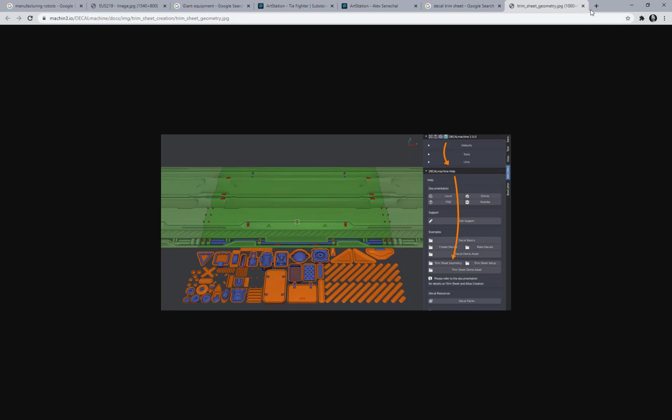This is one that I thought was pretty cool - I'll zoom in on it. He broke it out, or she broke it out, into separate pieces like this. And this isn't the one I thought of - hold on, let me grab this one. I liked this one because each of... I don't like the animation of it though.

I like that one because Decal Machine's talking about Blender, but I don't really mind if you do it in whatever - the thing to me is that the decals are floating. And the big thing we're going to focus on after the initial stuff is making sure they fit into a quad, basically, in most cases.

Okay, so let's get straight into it. Let's talk about what we need for reference, or what we're thinking about with reference. I've done a few of these, so I just do it blindly. But if you want an idea of where the reference would come from, it's this kind of stuff.

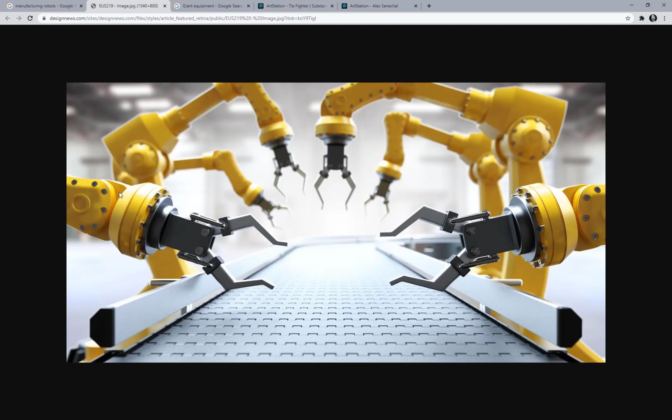These little detail things that we want to try and do - these little arm things, these free-floating things are different, but the ones that are stuck on the surface, that's the kind of stuff we want.

So all of these little hiccups and bumps and stuff, we can build and get something close to, and have fun doing it, and then use it on any model we want.

So let's talk about what we're going to do this time first. First off, we're going to do it really simply, inside of Max, of course, because that's what we work on in this class. We're just going to start with the simple forms, and it'll make sense as we go further and further.

First, we're going to try and do some insets. So insets are - let me see if I can find one of those references from the trim sheets. Oh, of course I closed that one. That was silly. There, decal trim sheet.

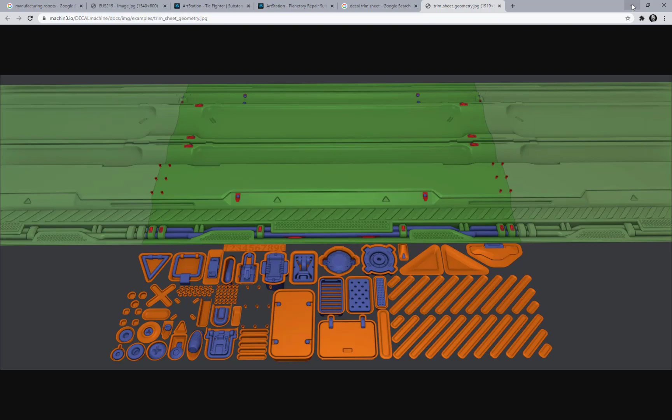We'll be able to build on those for multiple pieces. To start with, the first thing we're going to do is make a plane in the background here, from the top viewport. We're just going to drag it out. I'm going to make it 1,000 by 1,000 centimeters for now, since I don't know how big this thing's going to be.

It's not a big problem at this point. We're going to change this to a gray, like this. Then I'm going to right click on it, say Object Properties, and turn off Show Frozen in Gray, and freeze it. I could right click and freeze it, but then it makes the gray different, so I want to keep the color the same. Okay, so we have our plane.

Now let me show you what we're trying to do so you can understand the process here. If I unhide this, looking like it's being cut into the ground is what we're trying to achieve. Remember, all we're looking for is maps at this point, and those maps are going to go onto other objects to resemble detail that we don't have to actually pay for in geometry. So this is what we're looking for.

If you look at this, it's a rectangle, and I've put an edit poly on top of it. That's a little weird for me because I don't like using stack as much - I've told you before that's because stacks used to crash all the time, and I know there's a lot of people who use stacks. Okay, so let's just do one from scratch here, and I'll show you.

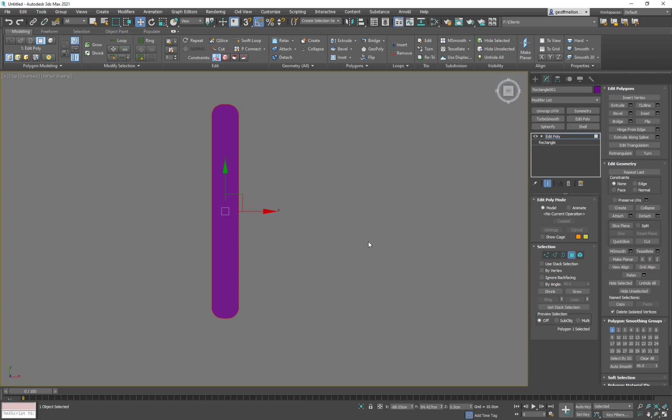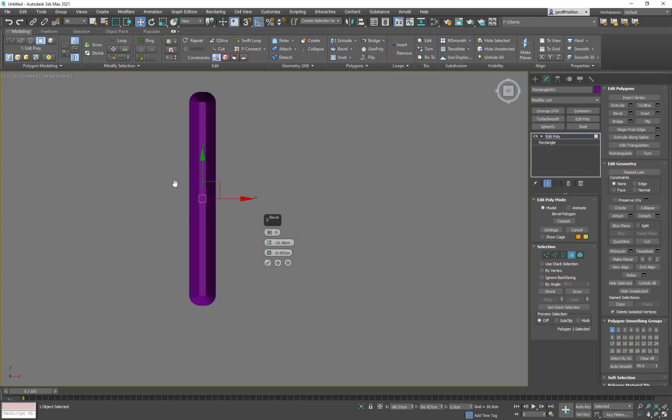I'm going to start to lose the original edge. So what I need to do is be able to figure that out dynamically - that's where it comes into play. You say, let's do like -10. I like to keep them even, and then I'll work with the actual shape prior to this to get the information I want so it feels better.

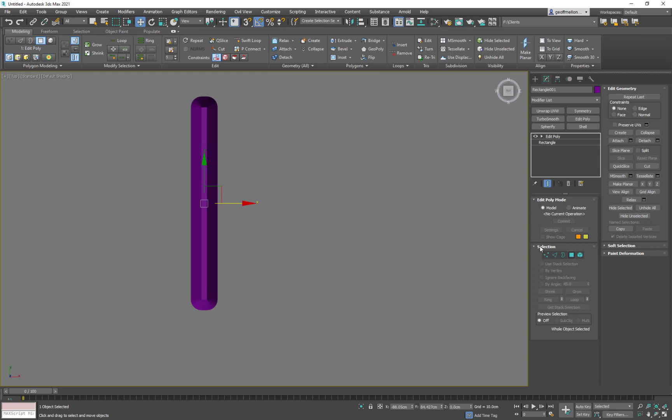Okay, all right, and then I'll come back to, remember this was the original form here, so I'll drop back down. If you want, you can get out of edit mode and copy it so you can see your edits compared to the original. You can even just delete it if you want. So there's the original. What I'm going to do is go back down in the stack, and then I'm going to play with this.

The numbers I came up with don't mean it has to be perfect, these are just for your own feeling. So I came up with 300, so it's a little bit longer like that. That's fine. And then you see there's these weird stretching things inside of here.

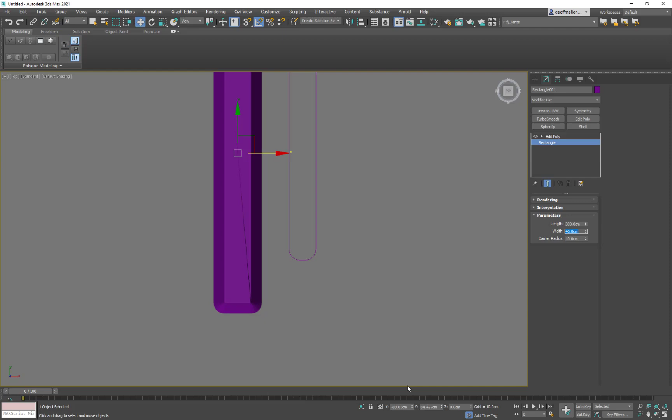So I changed this to 45, and then these are almost corners. What's going on here is they're overlapping - if I look, they're actually clipping each other. That's why we're seeing it that way. So I'm going to change this by scrolling up and down to get what I like.

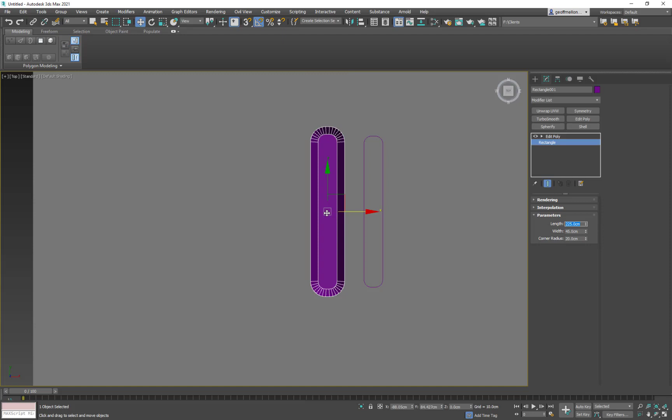And I'll get something like, I think I did 20. Yeah, so it's the same form. And if I want, I could pull this back to 250 or something, or even 225 - now that's the wrong number. There we go, and it's much closer to the original form I was thinking of.

Now if I take this off, you can see that bevel going in. We could also come back up here and tweak some stuff - say I want this a little bit deeper, though it doesn't really matter. Really all we need is the slant between the top and the bottom.

So we'll come here. The other thing I want to do is, if I look at this, when I've been changing it, it's changed my smoothing groups. I want this to be one smoothing group. So I hold Control and double click, and I just need to change it to smoothing group 2 and make sure this is smoothing group 1. And yes, there's n-gons - I know, it's crazy, right?

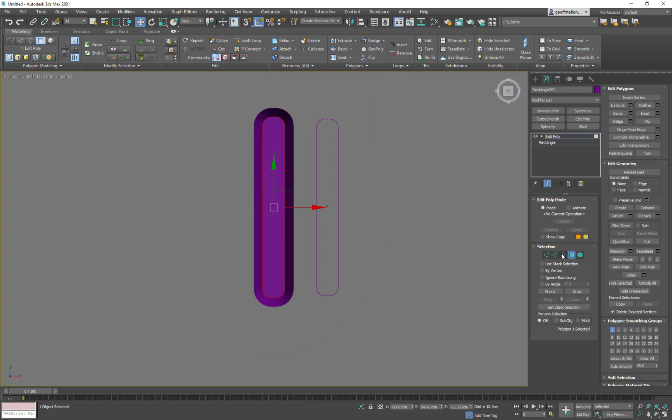But if I change this to the standard color, you'll see now I can delete this one. Got that. So that's what you should do - you should do it as a stack object, and you can collapse it after you're done with it.

So I'm going to do some of the basic shapes, and then I'll come back and show you some more complex shapes that we're going to start with. These are just the caps - the tops of screws. These are the hexagon pieces that go into making things look like they have a hex wrench on it or something, all those little details we were talking about. So let me go through this - I'll do it fast, and then I'll slow down when we start doing more complex objects.

So I'll do this one - I'll do a circle, and then I'll do a hexagon, and I guess that's probably it. Then I'll come back and show you how to do some more complex shapes like an X, okay, or a plus. So here we go.

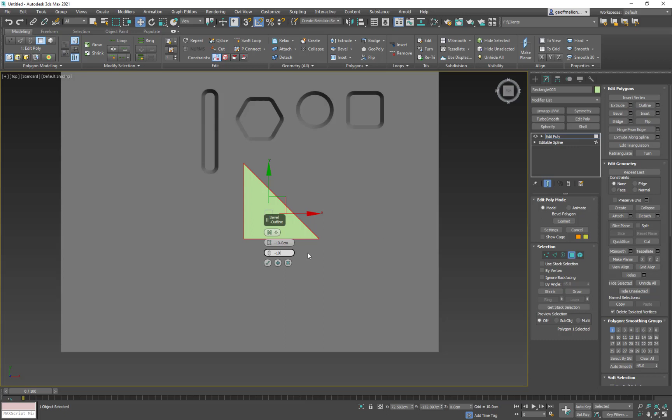fillet. Now this is the dance that we're going to have, so we may want to wait to do this part until after we do the next part, which is going to be exactly the same as we did a second ago. So I'm going to come in here, push X, say edit, go down to polygon, and then do my bevel, grab my face and say extrude or bevel, and do -10 by -10, and of course tab doesn't work, -10, and say okay. And now I've got my bevel in.

Now I'll go back down to my stack, make sure I turn this on for the final, and I will grab that fillet with all those verts selected, and I'll turn it up and see if I can get something that works pretty good. And there we go. We can kind of get the same feel for that. That's working pretty good. And people are like, why would you want a triangle, for example? Well, let me show you what you can use a triangle for real quick.

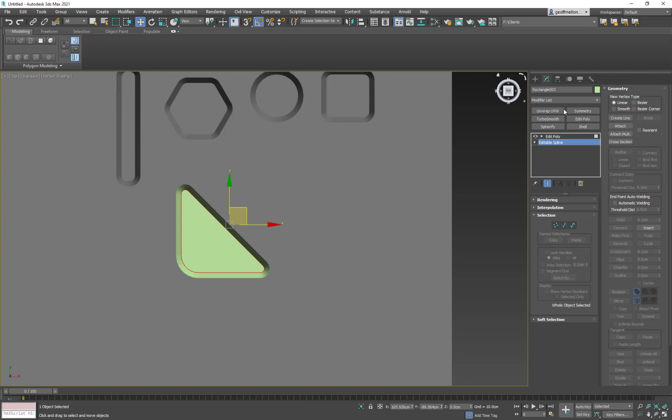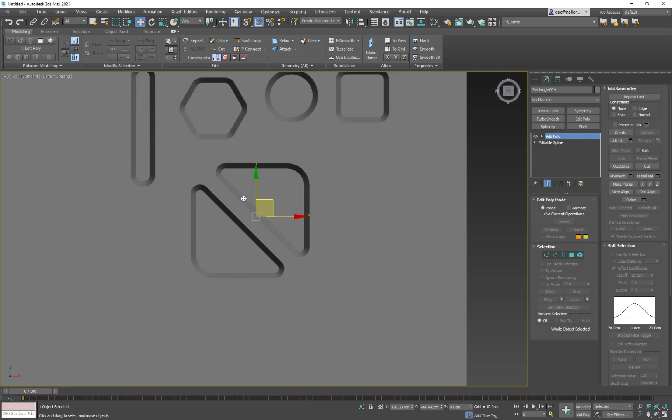Take this, we'll get out of Edit Spline, get out of Edit Poly, and we probably want to do that smoothing thing too, but come here and rotate it like this, 90 degrees, so you have a duplicate, and now you've got one of those boxes with the beams that go right through the middle of it. So things like that. There's other things to use it for too, and you could do a regular triangle this way too. So the last thing I'm going to show you is how to make a cross or a plus or an X if you want.

So I'm going to copy this one, and since I already have the rectangle done, all I have to do is this. I'm going to E and rotate it 90 degrees, so I got two of them, and then I'm going to delete the edit poly off this one here. Go to the original one. Let's see if I grabbed it. Yeah, go to the original one. It's a little bit hard because they're gray. Let me grab this one again and make it a different color just for now. We'll make it purple like that.

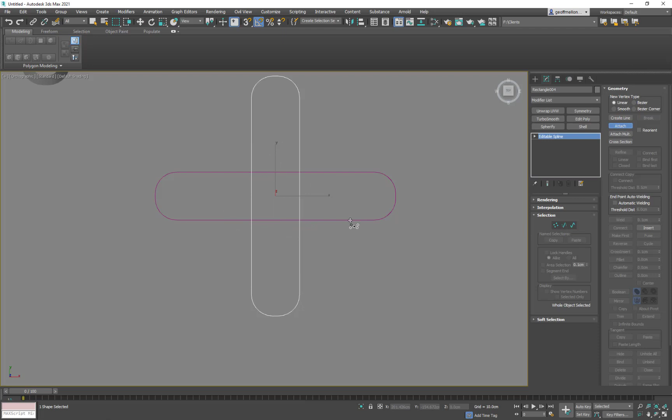Okay, and we'll come to here, and then you should see that they are kind of on the same plane, especially when I go to edit rectangle and don't show the final. So they're on the same plane. So I'm going to actually get rid of this edit poly, and then I'm just going to say convert to editable spline for this one, and then I'm going to attach these two pieces together. And this is where it's going to get weird. We have some dancing we'll have to do, but that's why we do it above. But first, we need to make these all one object and do that cross that we want.

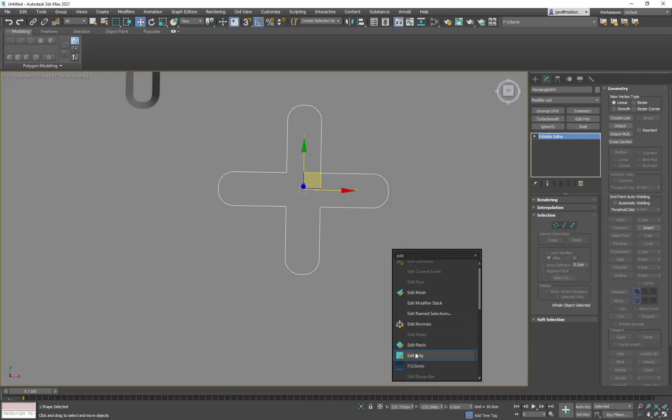So we're going to grab this edge, and we're going to come over to Boolean, and then with that on, we're going to grab this edge, and we're going to get this complex shape. Now, I'm not going to do any more of that until we put the edit poly on. I can round these. We'll see if we want to, but I can go X again and say edit, and then go down to poly, and then go to plane, grab everything, and we're going to get some weird stuff on this one, but it may not be weird until we start beveling those inside edges.

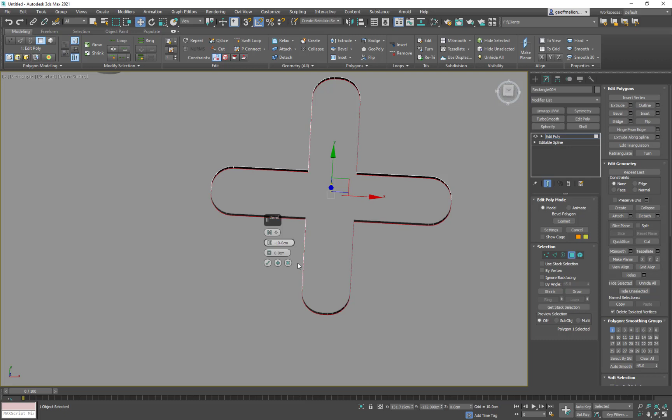I'm not going to bevel them on this one, but you'll see what's going to happen is it's going to complain, it's going to give me overlapping verts and stuff, because the inside edges with their bevels, it's just too much for it to understand what you want. So I'll come here, do -10, and say enter, and there we go. Okay, so now I've got it at the same resolution, and I can pull out and look at this. So I've got all those shapes and objects, and that's the first part of it, and we'll go over the next part of it on the next video.